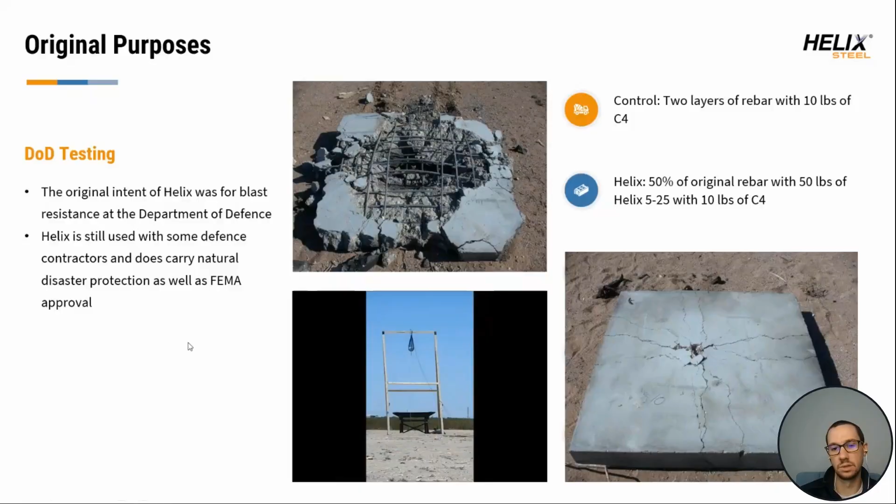What you're going to see here is the panel cracks even with Helix, but the goal is to keep that panel tightly together, which is exactly the same goal as we have today in commercial or residential applications. Concrete does two things: it's hard and it cracks. But our goal is, even under the most abusive conditions, to keep that crack from opening up and causing issues overall.

So, as we said, Helix Steel has 2 third-party evaluation reports under IAPMO and ICC. ICC is the group that publishes the IRC, International Residential Code. The IAPMO report allows us to design mainly commercial applications under ACI 318 for footings and walls, and it allows us to provide a ground-up design for slabs under ACI 360 under the yield line approach.

Our main applications are not only structural slabs and paving and flat work applications, but wall footings, pad footings, basement walls, duct banks, piping casements, machine foundations, mat slabs, and what have you.

So we can not only take over the flat work applications, but your vertical applications as well on site. Again, your ICC report is mainly for residential walls and footings, but we have seen a growing increase in footings that really can be designed either lightly with rebar or as plain concrete. You see that a lot in the Midwest here under frost applications. Very deep footings that maybe don't have a ton of rebar in them would kind of fall into that ICC report.

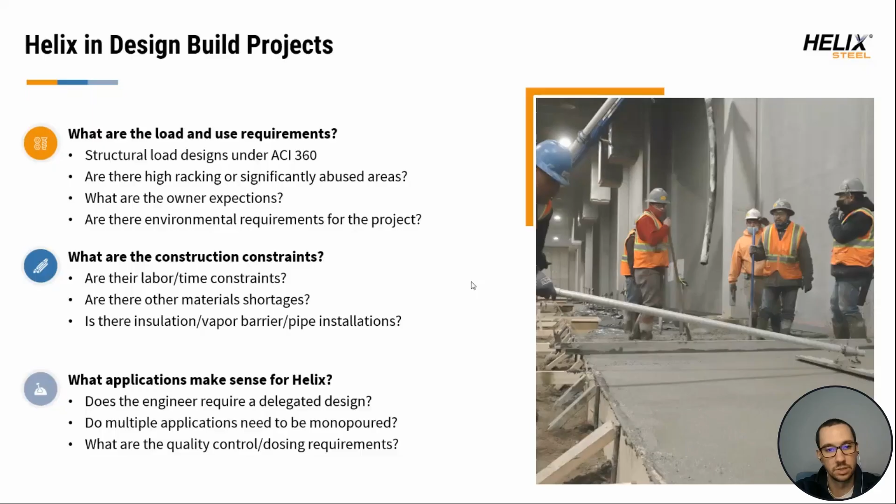So the first one is the initial battery plant that we did for General Motors. We are completing the second battery plant in Spring Hill, and we are actually starting the third battery plant in Lansing, Michigan for GM pretty quickly here, as well as a number of other projects for that owner. Barton Malow is the contractor on this project. The majority of the slab was an 8-inch slab with 9 pounds of Helix, pretty standard designs.

However, there were extreme footing designs under the coder area specifically, where it went to a 12-inch slab down to an 18-inch footing and back up, almost looking like church pews. So we took that to a 12-inch flat slab design so that we not only eliminated the need to excavate that area, but also eliminated the amount of concrete in that area while still holding the load for those coder

bridges. What that did was not only improve the constructability and the time constraints of the project, but also reduce the amount of concrete on site, and overall save the contractor and the owner quite a bit of money. But it's setting those expectations of what the engineer is willing to allow, what Helix can take ownership of, and what the contractor requirements are to feel comfortable with that project.

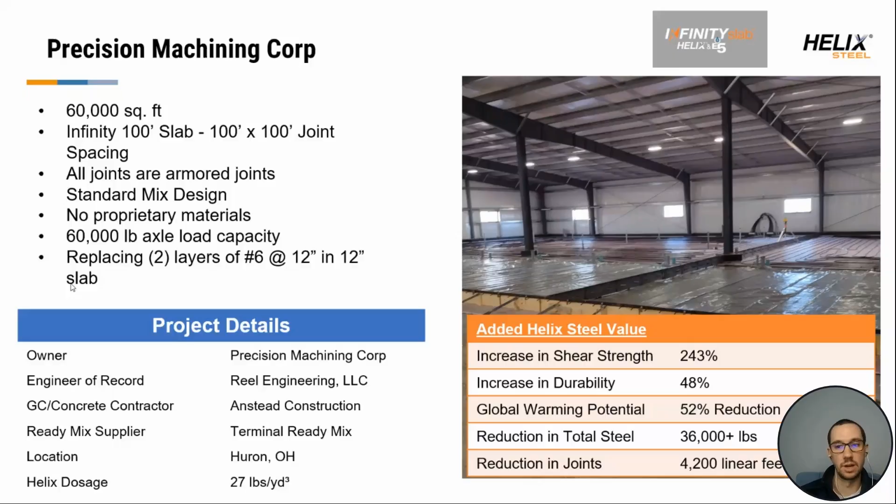And as you can see there, there's not only joint requirements, but there's in-floor heating, there's insulation that we had to work around. So, a lot of different applications. We visited this site multiple times to make sure everything looked good and was set up properly. But the owner is very happy with this project, and hopefully has a great slab for years to come.

This is a 650,000 square foot tilt building, pretty standard, quite frankly, in the southeast part of the United States. But what we allowed this developer to do was to get in this building 3 months faster. The ultimate lessee for this project is Walmart, actually Sam's Club, under the Walmart brand. What they were allowed to do is not only direct discharge the footings by reducing all of the steel on site, but also pump the slab over it so you didn't have to dowel in and have cold joints across that.

One other design that we did was on the north side of this building, where you can see here there's heavy wind loads. So there was additional rebar that went in on that wall footing. And what we actually did was we thickened that footing because of the increased bending moment requirements. But even by thickening that footing by an inch or two, we were able to eliminate the entire amount of rebar on site. So they only procured dowels at that point.

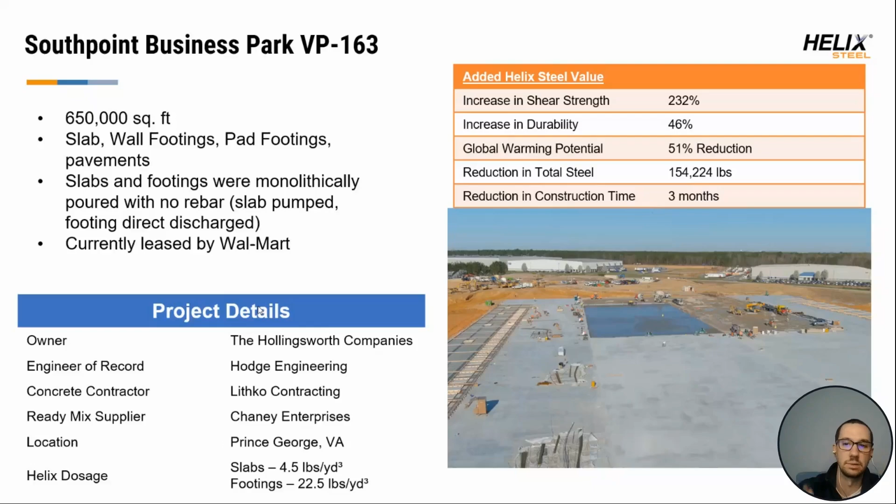So, it's kind of counterintuitive to increase the thickness of the footing. But for this instance, the increase in Helix and concrete made sense because you would eliminate an entire trade on site. It's all communication with the owner and what the expectations are, but it made sense in this application. So thinking outside the box allowed us to completely eliminate a trade.

This is an apartment complex near Grand Rapids, actually probably 3 miles from our factory. And again, owner expectations is what we're looking for. Thompson Thrift is the owner. They're actually the developer and the general contractor. And we eliminated all of the rebar in this 50-inch

footing through our ICC report, but we kept in corner bars because of the environmental factors right now in the Midwest over the summer: decreased humidity, increased wind speed, increased heat. Historically we've seen shrinkage cracks at corners across footings and walls. So with the owner's expectation to see no shrinkage cracks, increasing the rebar on site was needed, even if it wasn't a structural requirement.

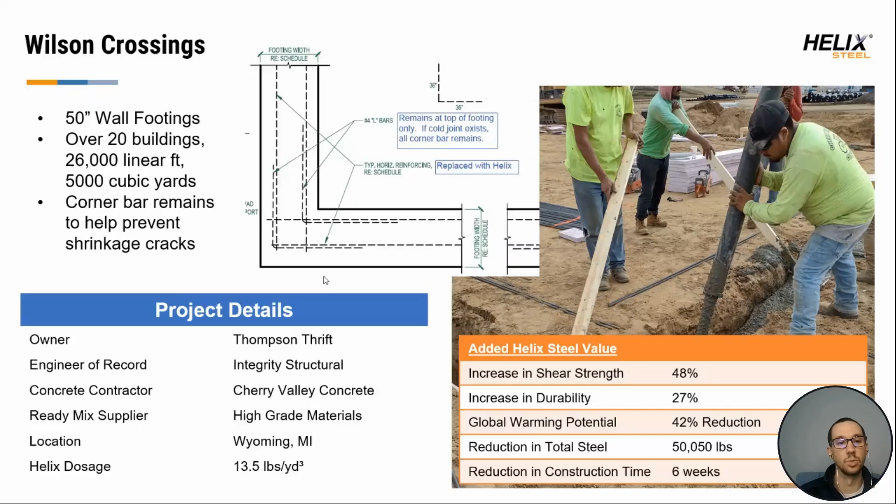And then this is a project showing how high we can go as far as walls are concerned. These are 24-foot high walls. This is a local manufacturing facility. They actually make the plastic that goes in ICF blocks for Logix and other brands. What we were able to do is remove all of the horizontal rebar and decrease the vertical rebar so that they could get in this plant faster. We also monopoured the slab with the walls and cut them near the thickened edge to eliminate cracking.

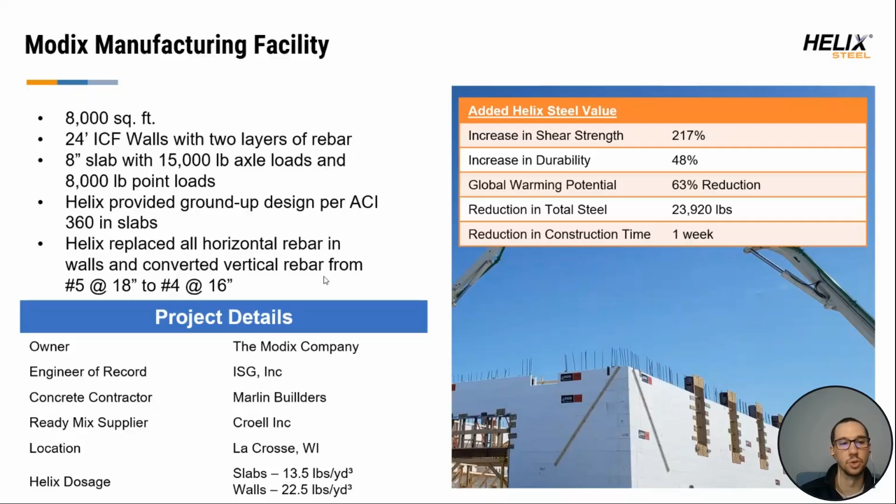But that monopour system, along with reducing the rebar, allowed it to get in about a week or two faster, and made the owner quite happy. Even if it was a small facility, we were able to kind of eliminate that full trade again and get that contractor off site faster.

So what is the owner expectation? Durability? Is it decreased construction costs? Is it finishability? Is it floor flatness? To identify exactly what we need to do on site.

So, any other questions? I got you on a little bit of break here.

Okay. Talked a lot about walls, footings, and slabs, but we see a lot of constructability improvements now in things like paving, duct banks, and insulated tilt panels. We've seen an increase with insulated panels, especially with the long lead times of metal buildings and precast panels. So if you have an insulated panel where you're having mesh on one side particularly, that may be a great

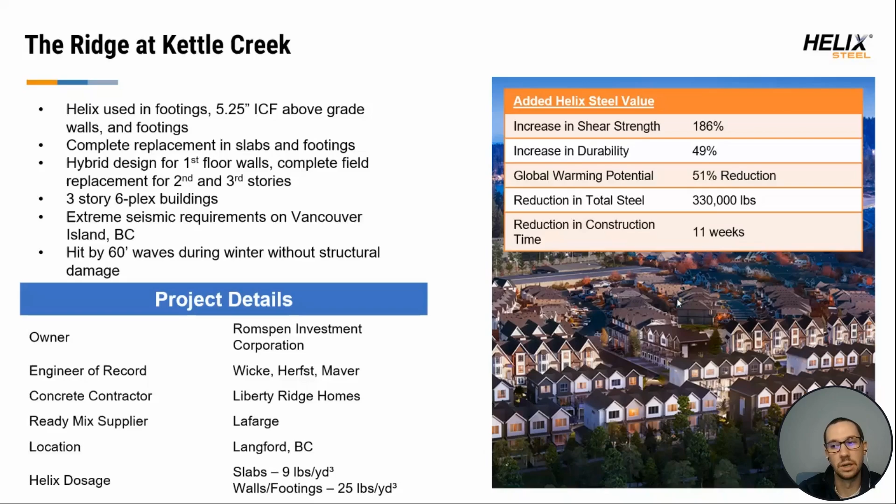We see a lot of these constructability and durability increases in the Caribbean, specifically with hurricanes and whatnot. So, the longevity and durability improvement of Helix does increase the lifespan of these buildings. In certain applications, we've done quite a few storm shelters and have FEMA approval under certain designs as well.

So, okay, and then not only obviously what the owner expectations are, but what are the concerns and requirements of the contractors on site? Are there concerns with mixing? Are there concerns with pumping? Are there concerns with finishing? We will have a pre-pour call with every project to make sure that we walk through those best practices and minimize the amount of issues on site.

We have options. Other discontinuous products only post-load. We can preload, we can post-load, we can site batch. We have blower options to implement and reduce any concerns that a contractor or a ready-mix supplier would have for this.

Finishing, normal finishing practices apply. We require some sort of vibration, but typical finishing processes, screeds, laser screeds and floating still apply. We still would like to see best practices. We do have a couple tweaks here and there. If you're cutting, for example, use ideally the purple blade from Husqvarna or something similar for the ultra hard requirements, so that you have clean saw cuts.

Pumping, you can pump this product. We have had people call in with concerns. We recommend a 3-inch hose. We've pumped it not only on foundations, but also up to 20 stories for slab on metal decks and walls.

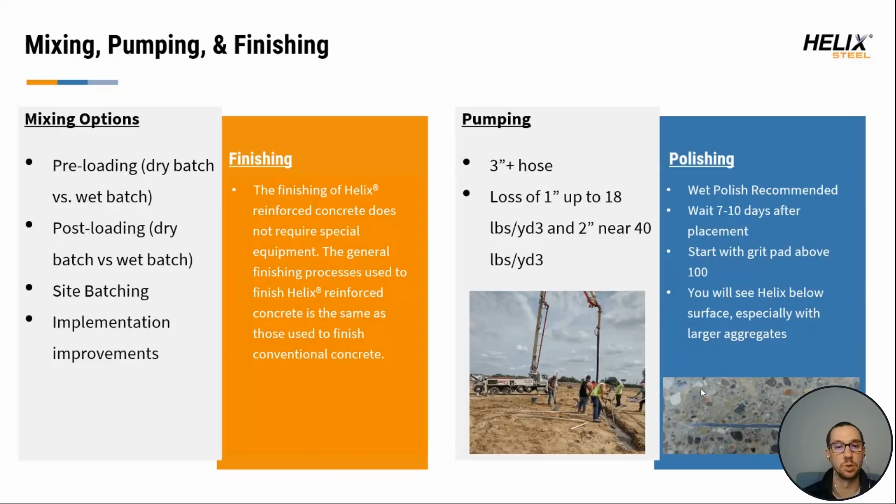So that's a very close up view, but you are going to see that it does give it a more industrial finish. It does sparkle over time, but again, is the owner going to be happy with that design? And then finally, there's the EPD and life cycle analysis.

We can provide full requirements for environmental factors. We've seen a drastic increase in this, and with certain inputs from the ready mix supplier as well as the contractors, we can potentially work through mix designs. We can take out steel. We can reduce transportation costs to meet the requirements of these projects.

We do have full LEED certificate or points as well. I believe depending on where you are, it's 6 to 7 points. But I would encourage you to have those conversations, because they do seem to sneak up from time to time with owners that are more and more involved in those processes at this point.

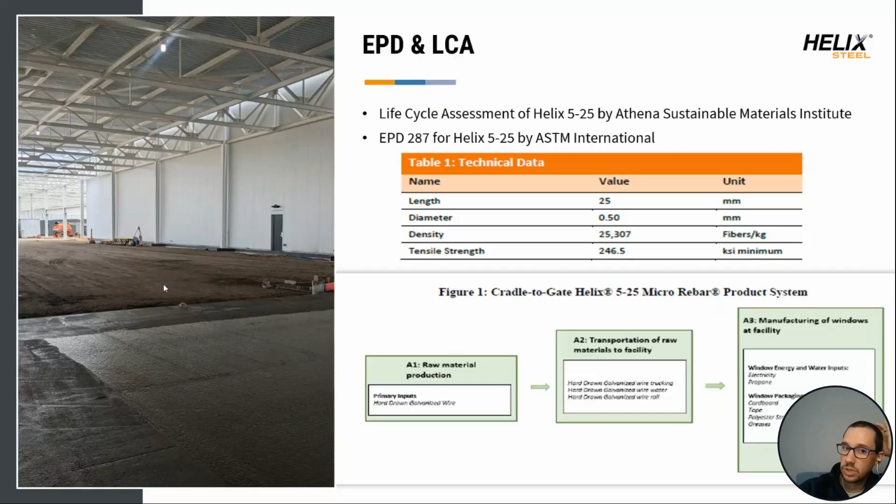And I know this is a short webinar. That's really all I have until we have questions here. And I'm happy to answer them unless Peter or TJ have additional questions right now that I missed. So, looks like, Greg, did I answer your questions regarding the waves? I wanted to make sure of that.

Foundation walls, yeah, we see a lot of use in foundation walls, both commercially and residentially. We probably put, I would say, 400 to 500 foundation walls for basement walls in this year. And we have seen a significant increase in commercial walls as well, mainly on the pre-engineered metal building side under stem walls. For basement walls, because it's braced on the top, we typically see 100% replacement. Commercial walls, we typically will see just extended dowels out of the footing, probably running through the top of the wall, designing more like a retaining wall.

And then Dennis, 40-foot tilt walls. I don't know what you're referencing as far as insulated or non-insulated. We'd have to look at not only the seismic application, but the thickness of that. I would say insulated 40-foot tilt walls, I think these are typically 32 to 40, and we could look at that in your area. Standard tilt, we do have requirements or restrictions on seismic zones, but yeah, I believe we've done insulated 40-foot panels, Dennis.

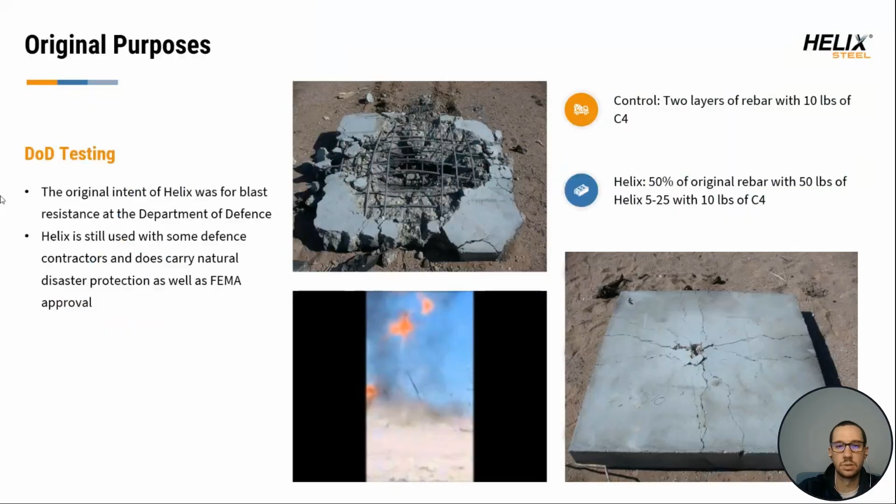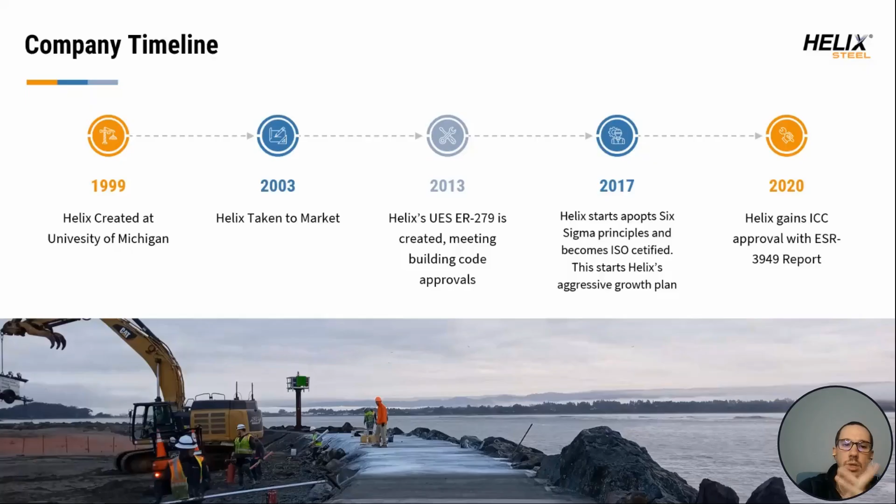And then, what info do you need to reduce dosage? So Joe, what I'd recommend is probably sending either your contact from Helix or submitting it through our submit a project button on our website, which I can actually put up here. You can click that button there and submit a project through the website to review your plans, and then we'd assign both a sales engineer and a project manager to that project to make sure that you get what you need. So, TJ, can you see that submit a project button now? Or Joe, can you? Should be up. Okay, perfect. So you can use that submit a project button for anything you need.

We're happy to jump in and work with you, your contractor, and your engineer. If there are groups that don't feel comfortable or don't know about Helix, please get us involved. We're happy to do individual lunch and learns for these groups to help them become more comfortable. We do also provide professional development credits, as we're going to provide a credit for this webinar as well. But what we would like to do is get in front of these people sooner rather than later, so that we can bear some of the brunt to pull Helix into this project if that's what you want to do.

Haney, what's the size of the coarse aggregate where Helix is most efficient? We've seen Helix work in larger aggregates, smaller aggregates, as well as blended aggregates. We've seen significant increases for groups that have optimized the size of aggregates, so we don't have an aggregate size where Helix is more efficient than the other.

Okay, so special care for stamped concrete. What I would recommend is, we've seen success with either roller processes or stamped mats. I'd recommend that you go through your normal process, make sure it has enough paste on it and Helix is down, and then stamp it after that. But we've seen success in both, mainly in agricultural applications, actually, with beef processing plants as well as chicken processing plants, so that it provides traction for the animals. But it doesn't require any special care on the surface. We'd just recommend doing a test area so that it really fits the owner's need and your need as well.

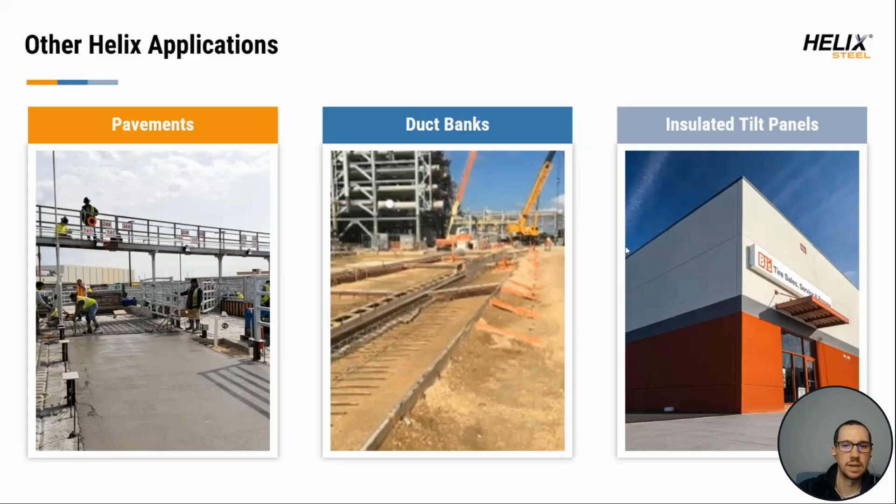Okay. Yes, Dennis, I like it. So our UES evaluation report does require some sort of normal weight concrete. I'm not sure what foamed concrete means, but we have used Helix in a number of lightweight projects, mainly for slabs on metal deck. So I believe this Ultium Cells project had lightweight concrete on the roof decks there. Just looking here. I believe that's the only one on this application, but we have used lightweight concrete in a number of slabs on metal decks in commercial applications.